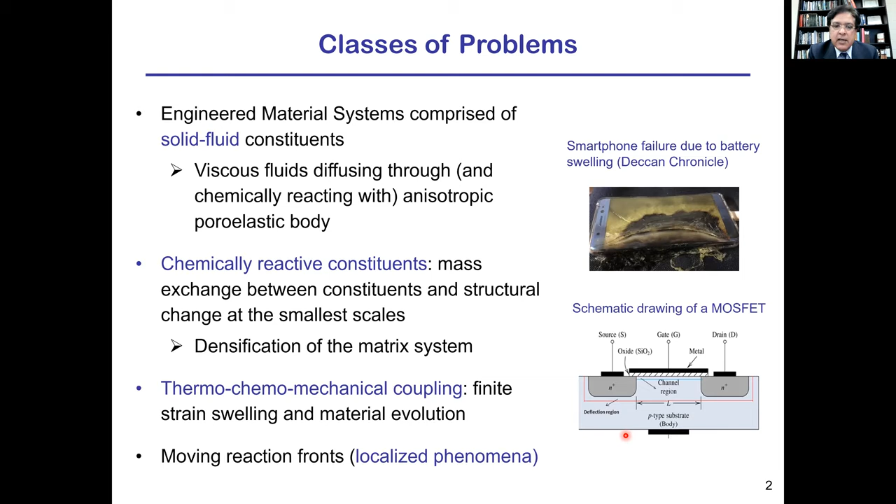So today I'm going to talk about a variational multi-scale class of methods that can be developed for the problem classes that I mentioned here. And we are going to adopt a mixture theory model to look at this problem.

So let's look at a two constituent mixture. One is a solid and the other one is a fluid. In mixture theory, we assume that the constituents co-occupy the same spatial domain. For example, in this particular case, we represent the density and volume of solid by rho_s and V_s, and for fluid, rho_f and V_f.

So we do not model each of the individual constituents. Rather, we represent these constituents through governing equations, the respective models, the balance laws, and we develop interactive force fields that provide information to one constituent about the existence of the other constituent.

So these balance laws are written independently for each constituent of the mixture. And in this framework, we do not model the geometrical microstructure, which can be very expensive from a computational point of view. Rather, we implicitly account for the interaction through some mathematical terms, which I will explain here.

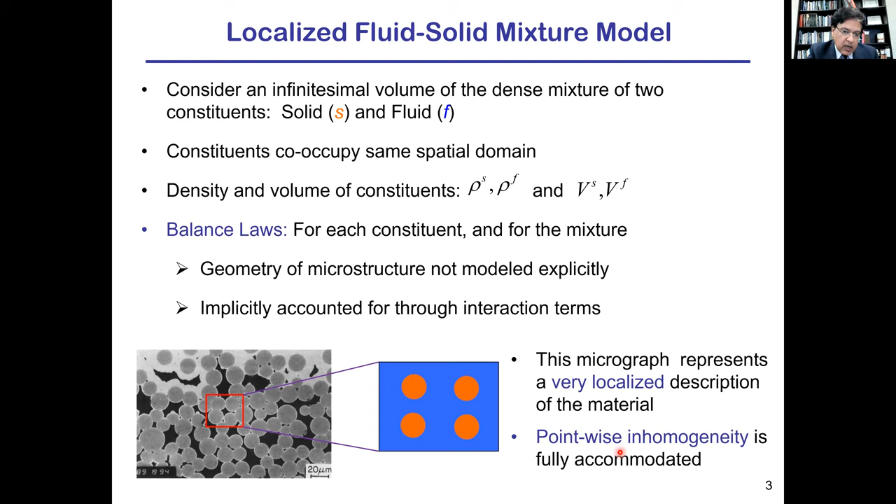As I mentioned, we represent each constituent by its own balance laws. In the present model, a fluid is infused through a deformable solid. So we have fluid balance of mass and fluid balance of linear momentum equations, and likewise solid balance of mass and solid balance of linear momentum. Our objective is to develop a framework in which the fluid can move relative to the solid.

We do not want to look at it from a constrained mixture point of view. Rather, we want a framework where the constituents can move with respect to each other, and also share or exchange mass between the fluid and solid subdomains. So we introduce a mass reaction term, MF, and likewise in solid. Since the constituents exchange mass amongst each other, the mass lost by the fluid is the mass gained by the solid. But this also gives rise to interactive effects at the fluid-solid interfaces in the constituent framework.

As the fluid flows past the solid objects, let's say fibers, it introduces drag forces. So we need to bring these interactive force effects into the balance of linear momentum equation for the fluid, introduced through an interactive force field. By Newton's third law, this is equal and opposite to the force field experienced by the solid constituent. Since we're interested in flow of fluid through the solid, the solid provides a domain in which the fluid moves—think of it as a sponge, with fluid moving through that sponge.

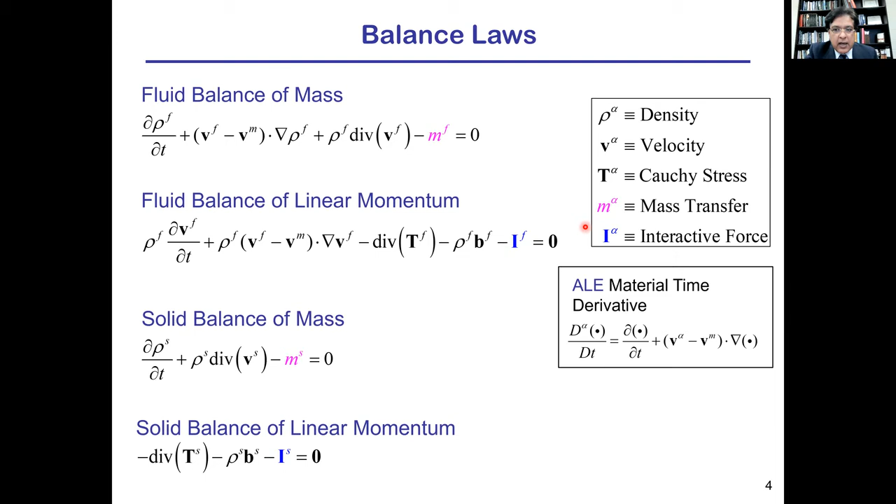We develop the constitutive equations by first defining the Helmholtz free energy function for the fluid and for the solid. Following the standard procedures, we get the Cauchy stress tensor for the solid and for the fluid, where the first term is the mechanical deformation part, the second portion is the solid chemical potential, and likewise we have the fluid chemical potential and the viscous stress term.

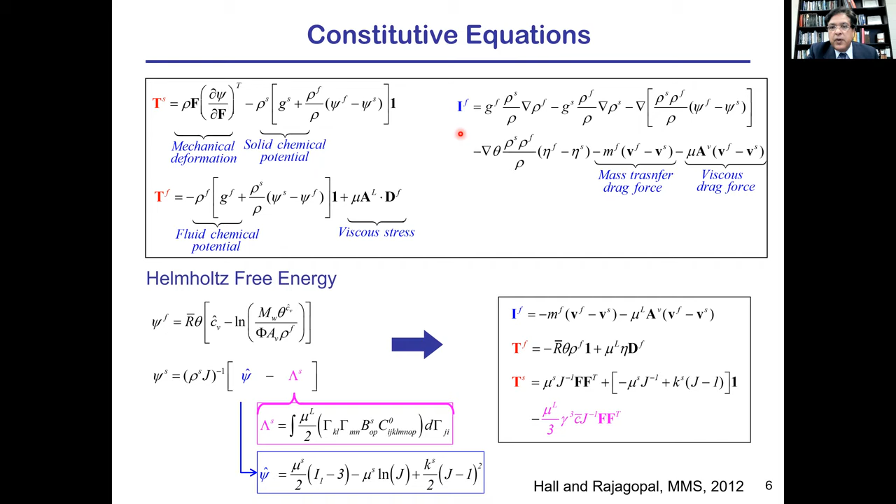The solid has an elastic part and a chemo-mechanical coupling term that arises here, giving gamma, the chemo-mechanical coupling term, which provides the chemical reactions and links them with the mechanical deformation. With this, we can develop our constitutive model for the fluid and solid. We also get the interactive force field, and the dominant components we use in our numerical model are the mass-transfer-induced drag force and the viscous drag force due to relative motion between the fluid and solid constituents.

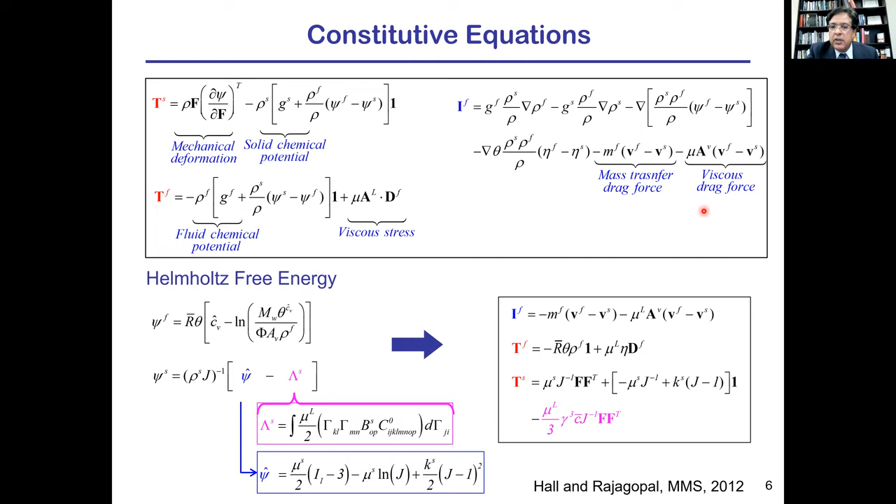We can develop the corresponding weak form by first defining appropriate spaces of functions for the unknown fields, which in this case are the fluid velocity, fluid density, and the solid displacement field. These are typical H1 functions, and we develop the weak form for the fluid mass balance, fluid balance of linear momentum, and solid balance of linear momentum, with the state vectors shown here.

In these equations, if the advection rate of flow is higher, fluid mass becomes an advection-dominated problem. If the reaction rate is faster, it becomes a reaction-dominated problem, giving rise to internal or boundary layers. Both these problems give rise to internal layers, sharp layers, and pose challenges for numerical techniques. Today I'm going to talk about how we can develop a numerical method—the variational multiscale method—to address these issues.

If you look at the fluid balance of linear momentum equation, it is an advection-diffusion-reaction equation. If diffusion is not dominant or reaction is dominant, it again gives rise to boundary layer effects. The balance of linear momentum for the solid is a diffusion-reaction equation because of the zeroth order term on the interactive force field. This interactive force field is itself a highly nonlinear field, being a function of the constitutive models and of the chemical reactions taking place. If this term becomes dominant, then even the solid balance of linear momentum equation can give rise to steep gradients.

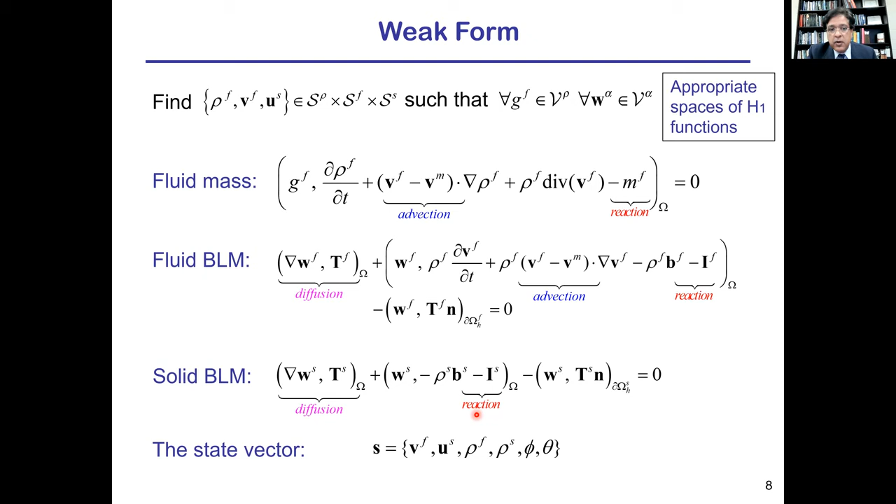In order to develop a method that can handle this whole range of problems and handle the singularities or steep gradients that appear because of the advection-dominated or reaction-dominated nature of the problem, we are going to use stabilized finite element method. I'm going to develop a stabilized method based on the variational multiscale ideas.

The underlying idea of the variational multiscale framework is that we decompose the unknown field into a coarse scale field and a fine scale field.

From a finite element method point of view, one can think of coarse scales as the scales that can be resolved by a given finite element mesh, and fine scales as those beyond the resolution capacity of the mesh. What is beyond the resolution capacity of the mesh is the error, and error is also a solution to the problem.

Our objective is: can we develop models for fine scales so that we can account for the physics that would otherwise be lost if we were doing calculations on cruder meshes? Can we develop a method that accounts for these fine scale effects? In order to do that, we do a multi-scale decomposition of the problem.

This VMS framework leads to a coarse scale subproblem and a fine scale subproblem. The key idea of the variational multi-scale method is to solve the fine scale problem and extract analytical models for the fine scales. If we cannot find analytical models, we can use numerical techniques to find a fine scale representation or estimation, and then plug it into the coarse scales. That is the general idea.

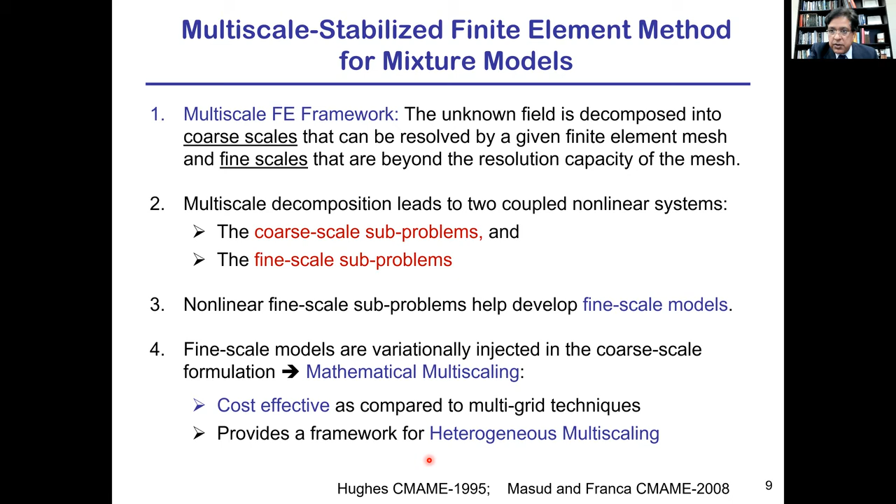In this framework, we can bring in models that represent physics at the finer level. The fine scale also provides us a mechanism, like a mathematical zoom, to look closely at the material and derive models, bringing in constitutive equations and constitutive models that represent the behavior of the material at that level.

In order to describe this mathematical construct, let's look at this abstract problem. L is the governing equation, U is the unknown field, and F is the source field. In the context of elasticity, for example, L is the operators of the elasticity equation acting on the displacement field.

We can develop the standard weak form by defining an appropriate weighting function integrated over the domain. This is the weak form, which is the basis of the standard Galerkin method. Now, with a good method and decent mesh, we are able to capture physics that is resolvable on that mesh.

For example, if we want to capture this sine function with oscillations, with a decent method, depending on the resolution capacity of the mesh, we will be able to capture the mean solution as shown here, but fine fluctuations can be lost. Now if these fine fluctuations, which tell us about the microstructure behavior at that element, at that spatial location, are important, the conventional wisdom is to refine the mesh and we will be able to capture the fine features. One can always do that.

However, we realized that this can very quickly exhaust the computational platforms given to you. So we ask ourselves: is it possible to develop a numerical method that can capture the coarse scales and account for the effects of these fine scales while doing calculations on cruder meshes? That is what I'm going to show here.

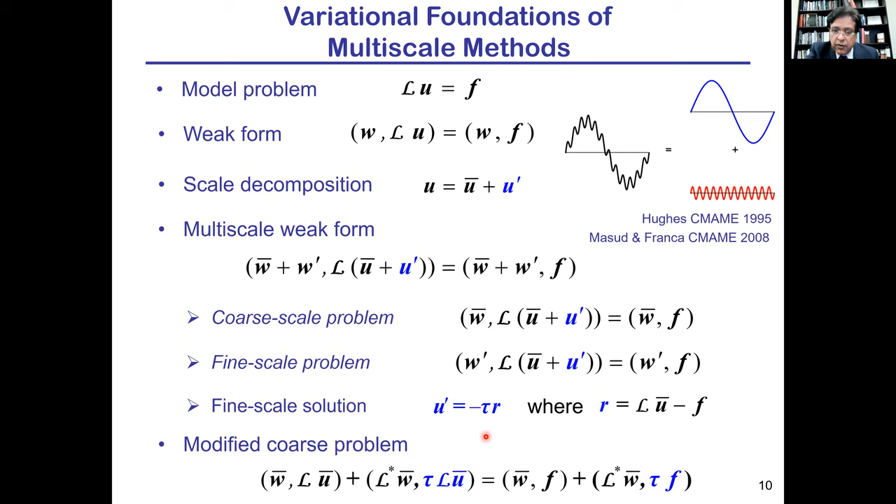In later works, we extended it to an approach where we can exploit the fine scale structure of the problem and derive the stabilization parameters, which in fact embed the physics into the formulation. This paper was presented in CMAME in 2008.

So let's look at this example problem from the perspective of the mass balance equation, which is a diffusion advection reaction equation. This is the advection term, this is the reaction term, and we need stabilized methods to account for the steep layers that can arise in either of the cases.

We assume an additive decomposition of the mass into coarse and fine scales, and likewise the weighting function associated with it into coarse and fine scales, giving rise to a coarse scale problem and a fine scale problem.

The objective, as I mentioned, is to solve the fine scale problem and extract an expression for the fine scale density, which can then be substituted into the coarse scale, giving rise to a stabilized method for the mass balance equation of the fluid.

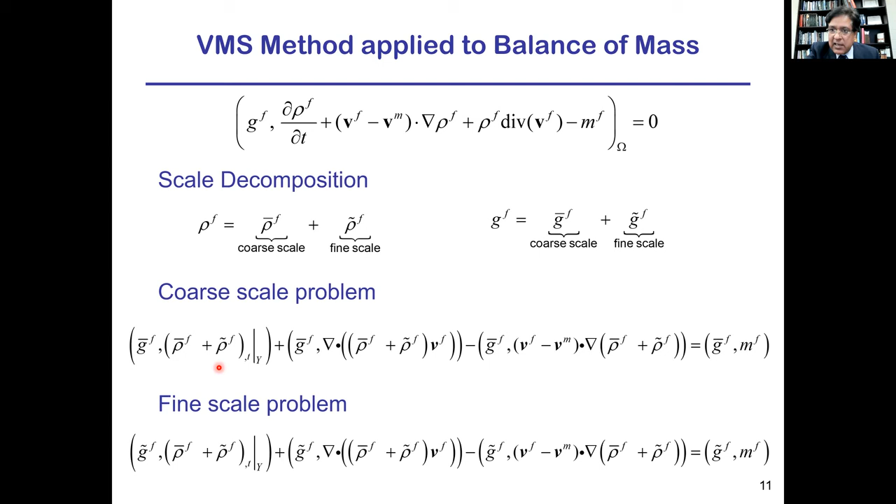In order to do that, we write the fine scale equation for mass balance in a residual form. R is the residual of the Euler-Lagrange equations for mass balance. What we say is that we expand these fine scale fields in terms of bubble functions.

The fine scale problem, in fact, is more involved, is as hard as the coarse scale problem. So we need to make some modeling assumptions to be able to find the expression for the fine scale. We say that we are going to use bubble functions, which are functions that become zero on the element boundaries.

What bubble functions do is they help us localize the problem to the element interiors, and then we can either use analytical tools or numerical methods to find an expression for the fine scale.

So what we do is we substitute this expanded form, in terms of bubbles, of the density and its weighting function, in the coarse scale problem, into this fine scale problem, and solve for the fine scales.

We see that the fine scale model comes out, the fine scale is proportional to the residual of the corresponding Euler-Lagrange equation. We substitute this rho tilde into the coarse scale problem, and we get this stabilized form for the mass conservation in fluid.

The terms in the top row are the standard Galerkin terms.

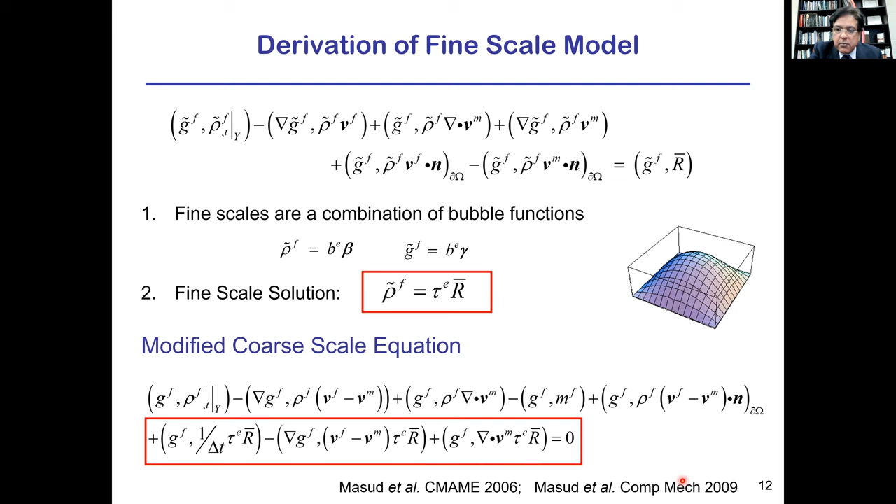So we can follow along this line and develop a stabilized formulation for fluid velocity.

This is the standard Galerkin term, and the second term here represents the stabilization terms, where R is the residual of the momentum balance equation for the fluid, which is different from the standard equation because now we have the interactive force field, and this interactive force field tells the fluid constituent that there is a solid constituent coexisting with it in the domain.

Then we have this additional term where the chi parameter can be analytically derived, and we have done this derivation. This is the stabilizing term, and in the process this stabilization tensor also appears. We can see that interactive force field appears in this expression, and B are the bubble expressions for the fine scale bubbles. So what we see is that the assumption of using fine scale bubbles only resides in the definition of tau.

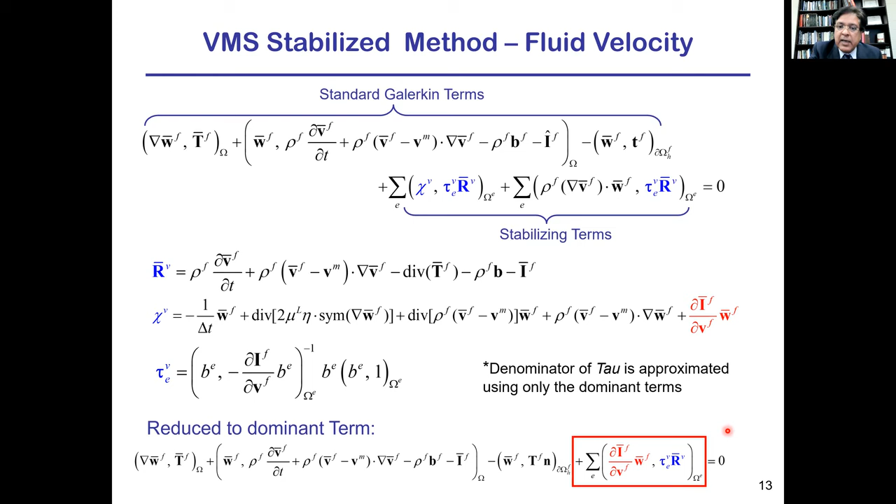Nevertheless, the explicit expression for this parameter or tensor can be derived, and this embeds the missing physics into the formulation. So we have used a simplified form of tau where we only keep the dominant terms in the denominator of this parameter, and with the reduced term we get the modified stabilized form for fluid velocity, and we have implemented that in our numerical methods.

The first numerical simulation I'm going to show is slurry infiltration in ceramic composites. Here there is a ceramic preform, and there is a liquid that brings in silicon dioxide particles, normally in the form of water. It deposits, and the particles get deposited under gravity. We repeat this cycle a few times, and that helps in reducing the porosity of the material.

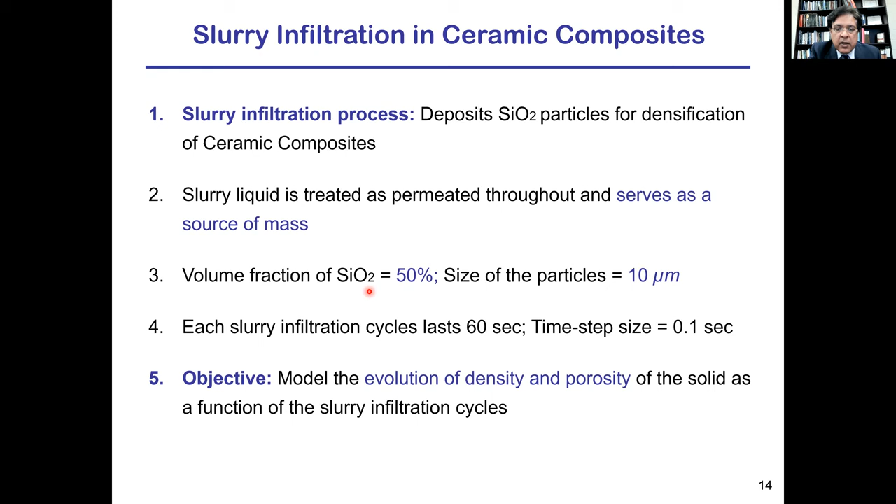Eventually the material is heated up to make one continuous material, where chemical reactions help increase the density of the material. Here is the process showing increase in the solid volume as a function of the slurry infiltration cycle.

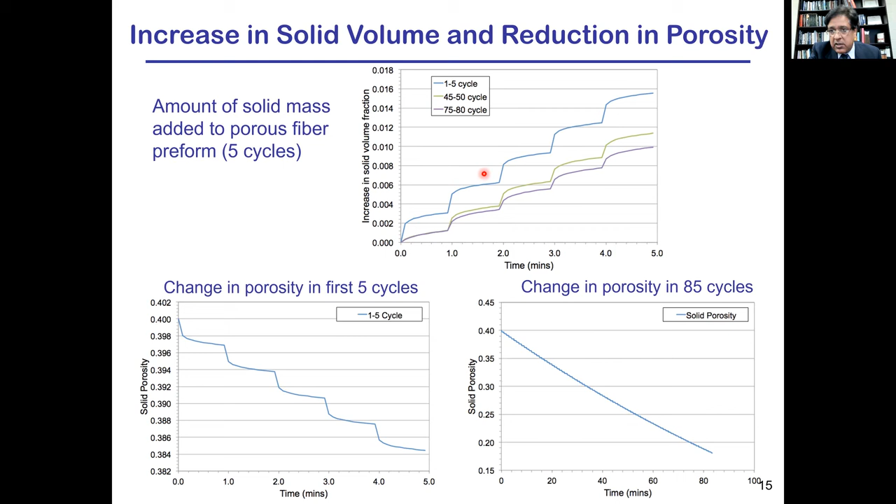So in each cycle, as the particles come in, fresh slurry material comes in laden with more particles, so there is a rapid increase. Then as the particles get dropped, the rate of increase in the volume fraction of the solid decreases. So next, a fresh cycle is repeated. This model can be used for slurry infiltration.

The next numerical simulation is chemomechanical coupling in a mean background temperature that is sufficiently high so that it helps silicon carbide react with oxygen to give rise to silicon dioxide. So this is the specimen. The material is open to outside oxygen, and oxygen diffuses through the solid.

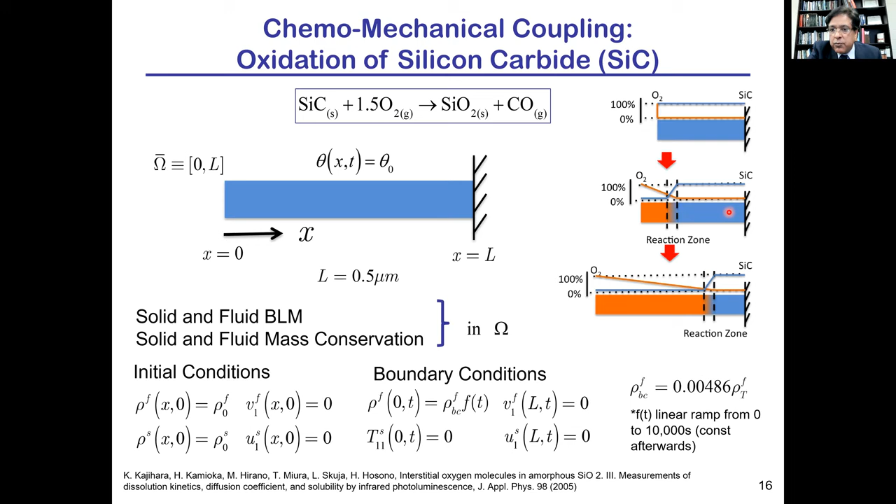There's a chemical reaction that is taking place. This advancing front moves in, so there's reacted material and unreacted material. This simulation shows the reaction front diffusing into the unreacted material, and material is transforming rapidly across it. These lines show the advancing front for different mechanical material properties.

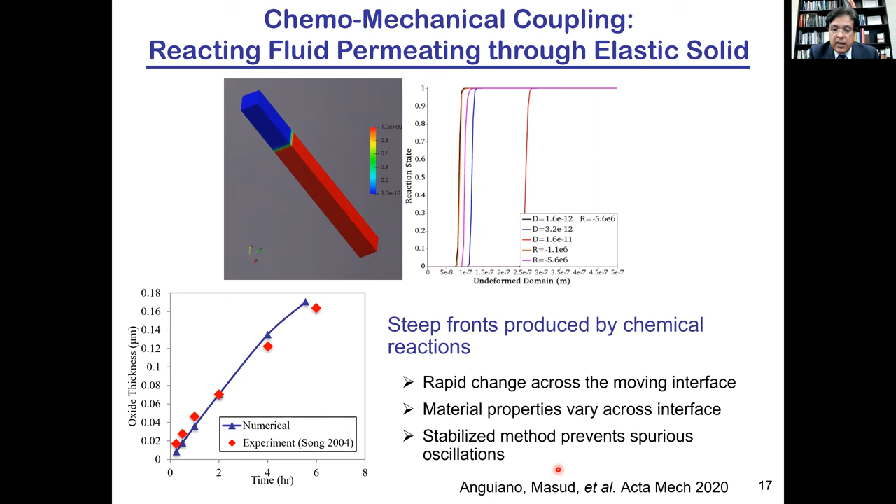Very steep front, but we are able to capture it without any overshoot or undershoot. Here are comparisons with experimental data of oxide thickness as a function of time. Stabilized methods provide us a mechanism to stabilize the moving reaction fronts across which the mechanical properties are varying rapidly, and the geometric deformation is substantially large for this problem.

The next numerical problem is a silicon wafer bending problem, typically in electronic structure modeling. Again, silicon reacts with oxygen. The top surface is exposed to oxygen and it expands. Expansion is about two times the original volume, so there's a substantial change in length at the top.

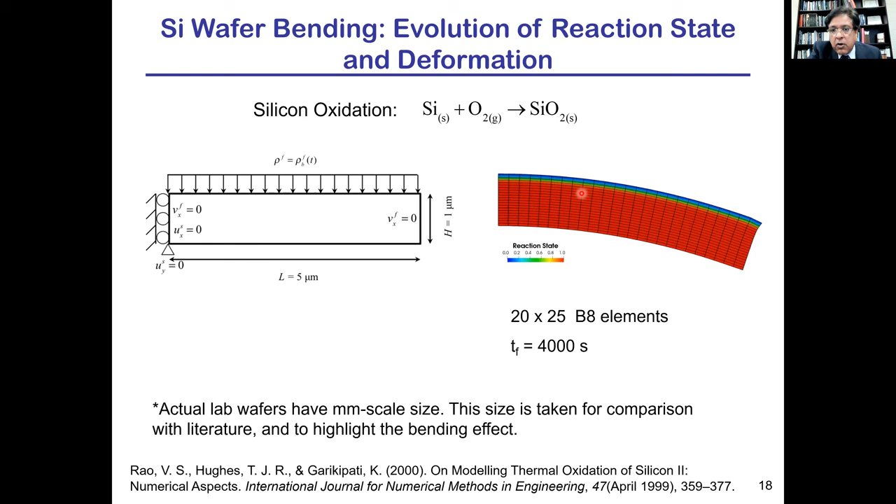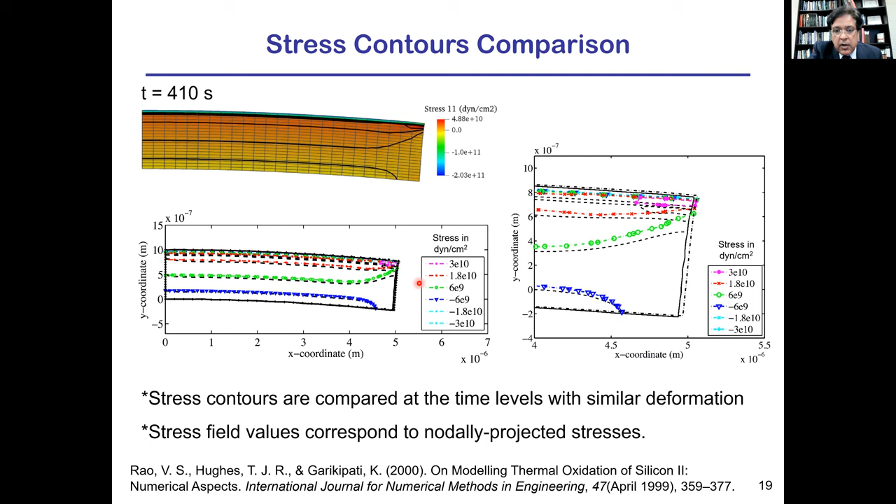Since the material is contiguous, you can see the advection front moves from reacted into the unreacted zone. This yellow line moves down, and because of this there is a local bending moment that is produced, giving rise to this large deformation. We have plotted the stresses for this case and compared them with some published results in the literature for equivalent deformation.

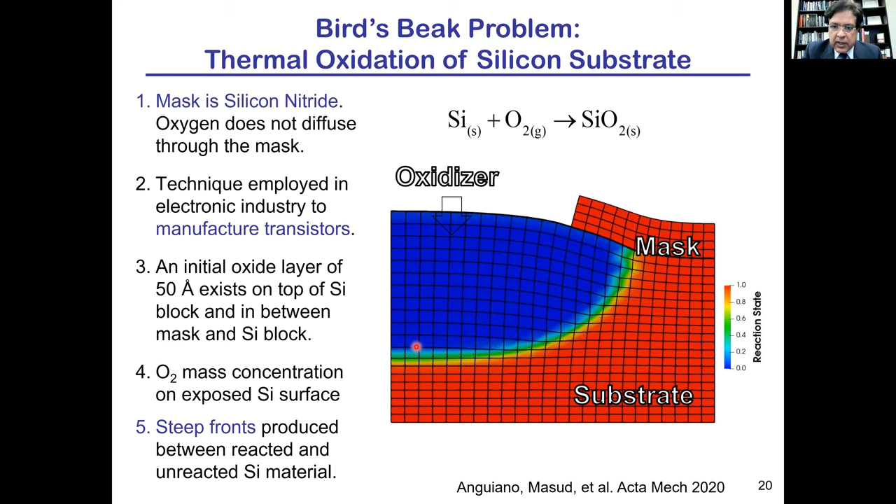The next test case is the bird's beak problem, a typical problem in the electronic industry for manufacturing transistors. We have a silicon substrate, which is masked by silicon nitride that is impervious to oxygen. As oxygen diffuses, the material front moves forward and silicon dioxide is produced, which is substantially larger in volume.

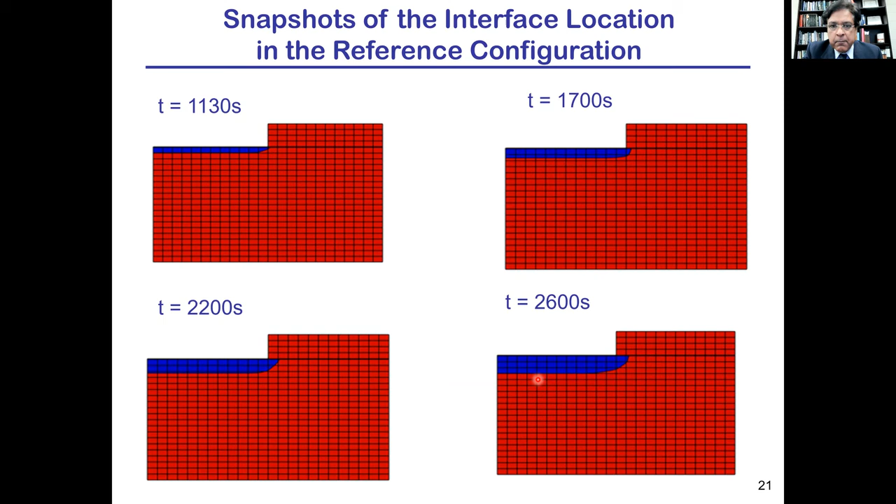This slide shows the X and Y displacement at points 1, 2, and 3. For example, here we have a snapshot of the vertical displacement at point 1. Red are our results and blue are the results from the reference. We get a good correlation. However, since the two material models are different, we see some variation, but overall the response of the two models is fairly consistent.

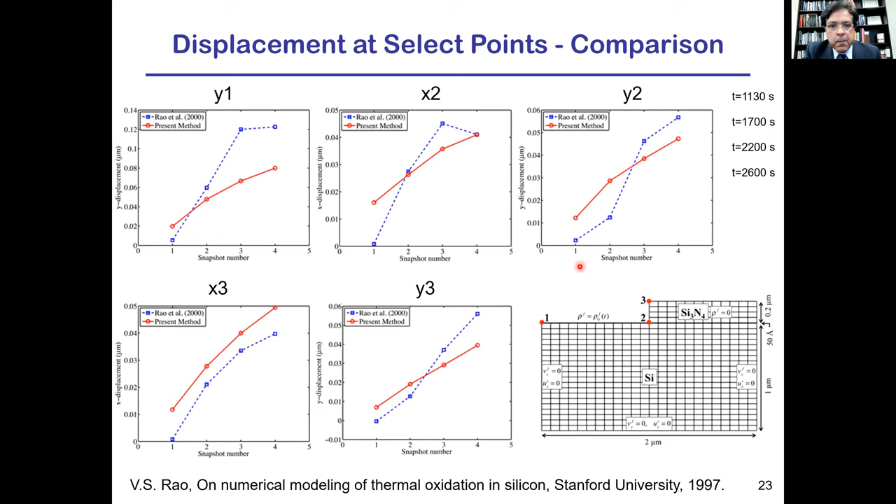Here is a snapshot at one of the points along the deformation, frozen in time. So we have von Mises stress distribution, and this is the advancing front.

This is the temperature change, and we see that temperature is higher in the region where the reaction is taking place. We also see that the residual is higher in the elements being traversed by the advection front. Since I showed you that variational multiscale method, the fine scales are proportional to the residual of the Euler-Lagrange equations, so fine scales are also higher, or these fine scale models are capturing the missing physics in this part of the domain where the residual is higher.

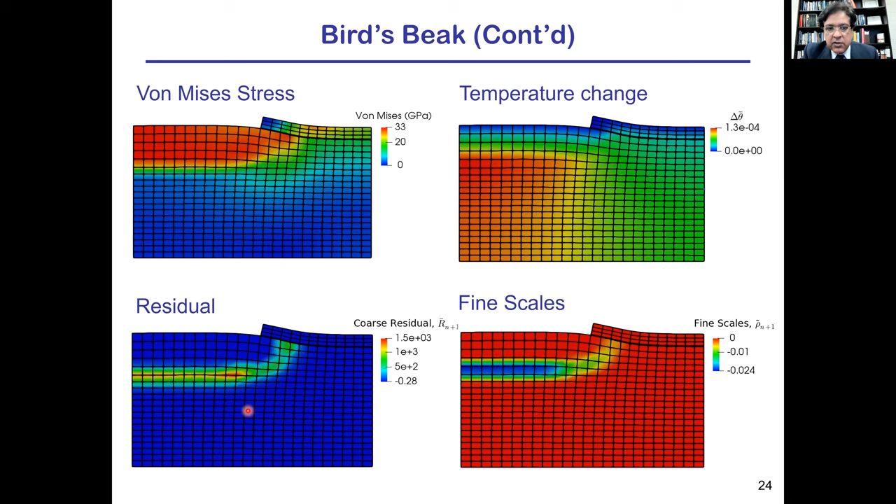These kinds of problems are typically solved with considerable mesh refinement using mesh moving techniques. We have shown a stable response of the advancing front of the material, across which the material is changing from silicon to silicon dioxide, and we get a very smooth profile on just the very first mesh that we created.

We are now extending it to thermomechanical problems, for which we need to write the Helmholtz free energy function as a function of temperature field. This gives rise to constitutive equations where the Cauchy stress for the solid and the fluid is also temperature dependent. In addition, the mass conversion rates are also temperature dependent.

So we need to solve for an energy equation. We need to add this energy equation to the balance laws for the fluid and for the solid, and this gives rise to significant coupling effects.

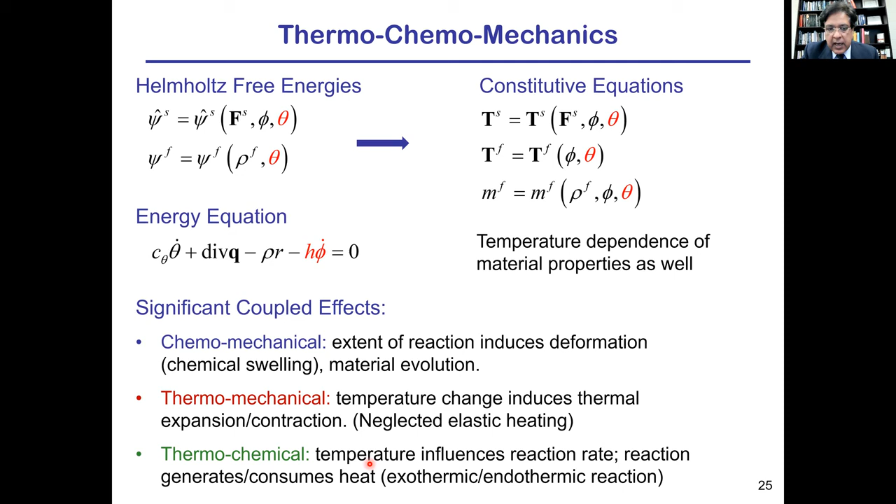I will show you results that account for chemomechanical coupling, meaning extent-of-reaction-induced mechanical deformations; thermomechanical coupling, meaning temperature-induced deformations like thermal expansions and contractions; and thermochemical coupling, meaning temperature changes induced by the reaction rates. Reactions can be exothermic or endothermic, and that can locally change temperature across the moving front.

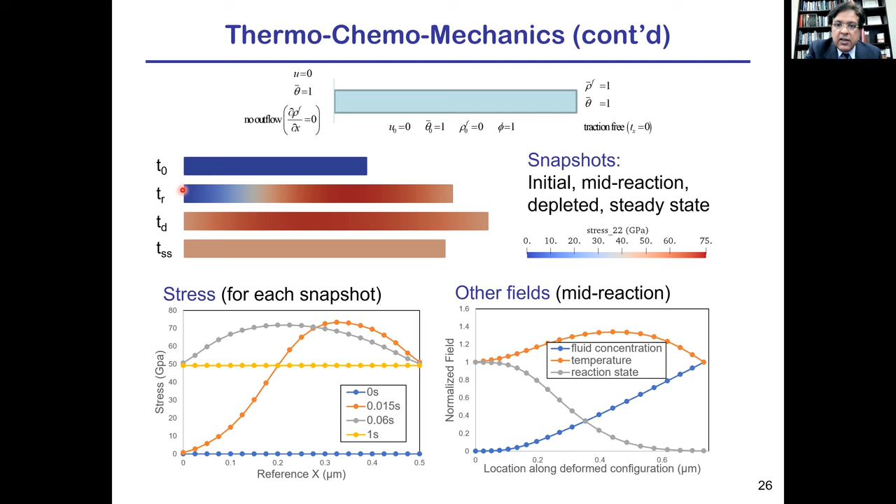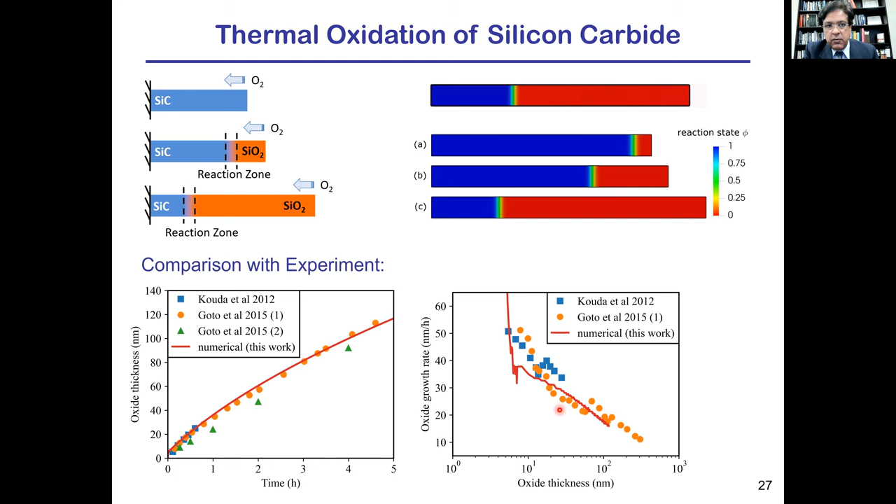As my concluding remarks, I've presented a mixture theory model for the coupled thermomechanical response of material. The mixture theory model behaves as a reduced order model because we are not individually modeling each constituent, which in this discussion was fluid and solid.

Rather, we are bringing in the effects of their interaction through interactive force fields. Each constituent is modeled with its own governing equations, or its own balance laws. The model also accommodates pointwise inhomogeneity in the material, while accounting for inter-constituent interaction via interactive force fields, which appear because of the local force balance in the evolution of the material.

As the material is being formed, mass is being exchanged between the constituents, which gives rise to mass-exchange-based interactive effects. If the fluid constituent flows relative to the solid, then a viscous drag force is induced on the solid, and vice versa on the fluid.

I've also presented a stabilized method for solving these classes of problems where different constituents are evolving with their own balance laws, and there are reaction fronts, which could be advection dominated or reaction dominated. I developed the stabilized method based on the variational multiscale idea, from the perspective of the SES society, where we are looking at the modeling of the material. Variational multiscale is not just a method for stabilizing numerical techniques, it is also a method to build in fine scale physics, which is otherwise lost when we do computations on cruder meshes.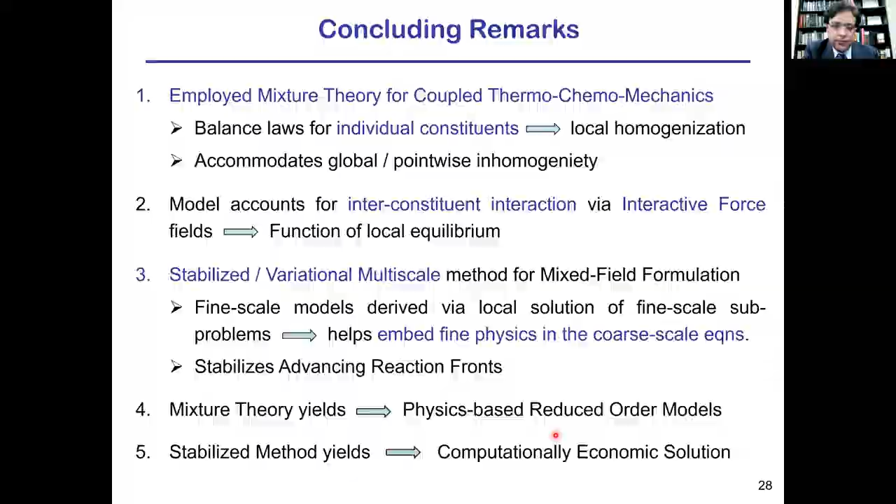Let me refresh the page to see in the live feed questions. Yes, we have Hamed Aftabaradaran, if I pronounce it correctly, who says: do you think the model would be applicable to lithium-ion batteries?

Yes, very good question. That was one of the viewpoints that we had. So in lithium-ion batteries, you will have to model the convection of ions, and so you can add an advection equation to model that. That advection equation will have the advection type terms that I talked about. So you will be able to, you can definitely model with it.

So lithium-ion batteries will give rise to swelling, so the kind of problems that I was showing you, you can absolutely do that with the advection term or equation that you will add for the concentration. You will have as many advection equations as you have species in the system, so the system can become very intense very quickly. And you will need stabilization techniques, and the ideas that I presented you can definitely apply there to model this framework, these kinds of problems.